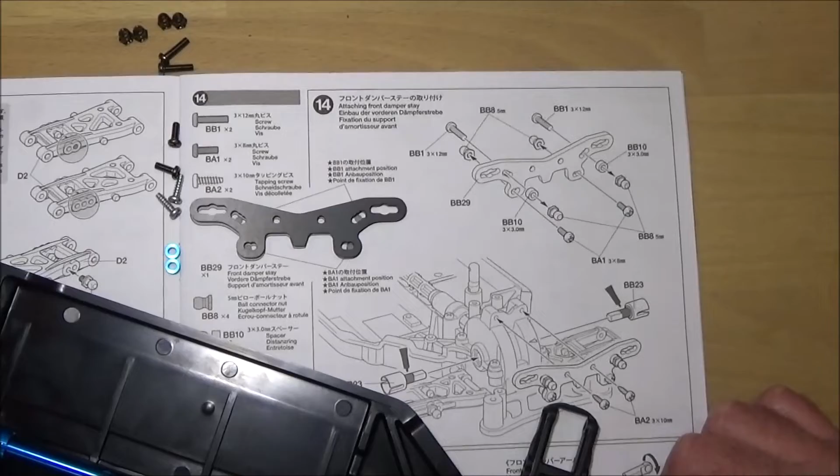Welcome to part 2 of my TT02 Type-S build. You see we've got this far already. We've got the lower arms mounted, the motor and all the gears in place, and the differentials.

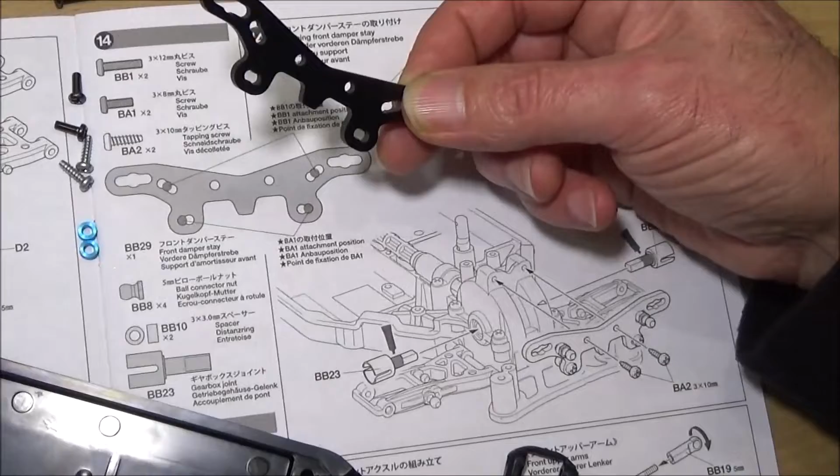So we're going to start this part on step 14, which is attaching this rather nice 3mm fibre reinforced damper stay, as they call them, or shock towers, whatever you like. We've got the parts ready here for this step. Just swivel this round, so this is the front.

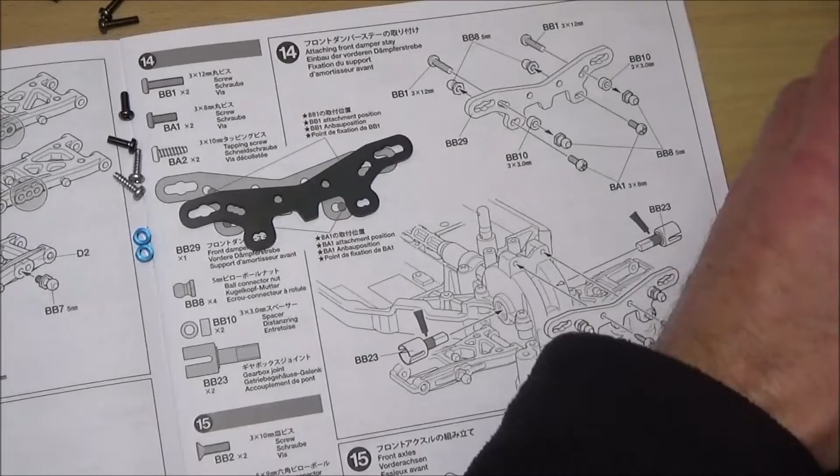What we need to do first is get these ball joints mounted in the right holes. So I think we'll start with BB1s, the 12mm. It says put it in the centre. Again, I might be adjusting this later depending on how the setup looks.

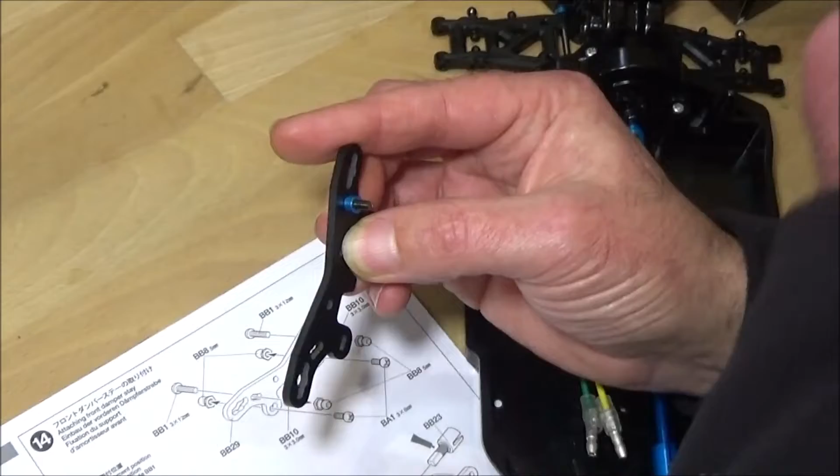I'm going to put a tiny bit of thread lock on here as recommended by Rob, because we've had these ball connectors come undone, haven't we? So we have. Is that too much, Rob? Should I wipe a little bit off? I can't really see them.

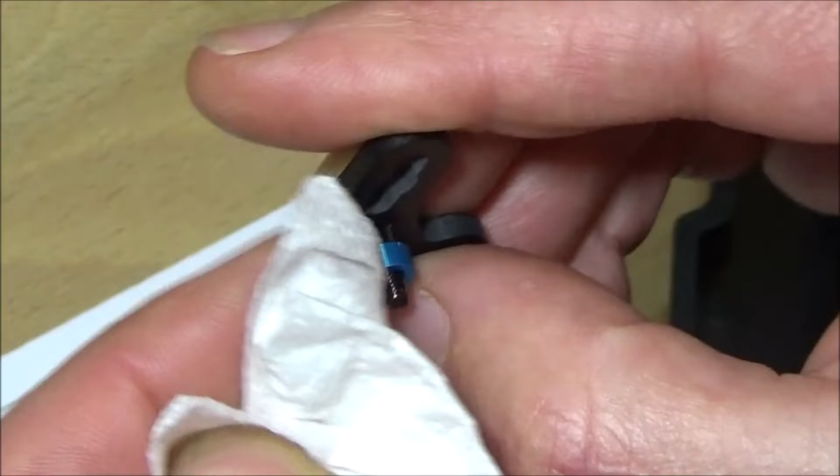Oh, you're looking through the camera monitor, aren't you? Yeah, that was a bit too much for such a size, because apparently it is this really strong stuff. Oh no, the red stuff is. So I might not be able to adjust the suspension in the future. Well, it won't come off. As I said in one of my replies, I've not had a problem undoing stuff when using this red stuff. Right, well that's good to know.

I think obviously I've just gone ahead with this, but this doesn't matter which way round you put the damper stay, because it's just a flat construction, isn't it? It is, so it shouldn't really matter which way around we go with that.

We need the shorter 8mm engineering screws, and it says to go to the outside of these two, and these are for the top suspension arms, aren't they? Yeah, so I'll try not to get any of this on the FRP.

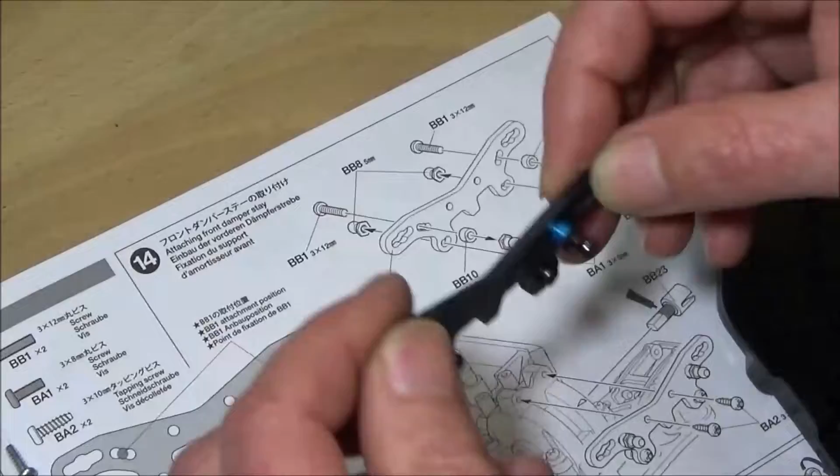And we nip those up there. This is the two 10mm long screws to attach it to the top of the diff case.

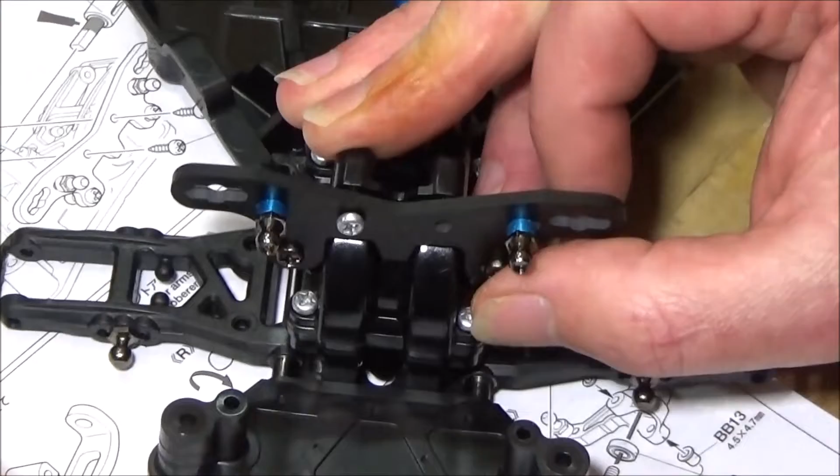So we're just going to fit this on here, and the last thing to do on this step is to fit the output shafts. I call them output shafts, again we've had this before, they call them gearbox joints. Just going to put a bit of grease on there as it shows, and just slip them in and hope they don't fall out. And then step 15.

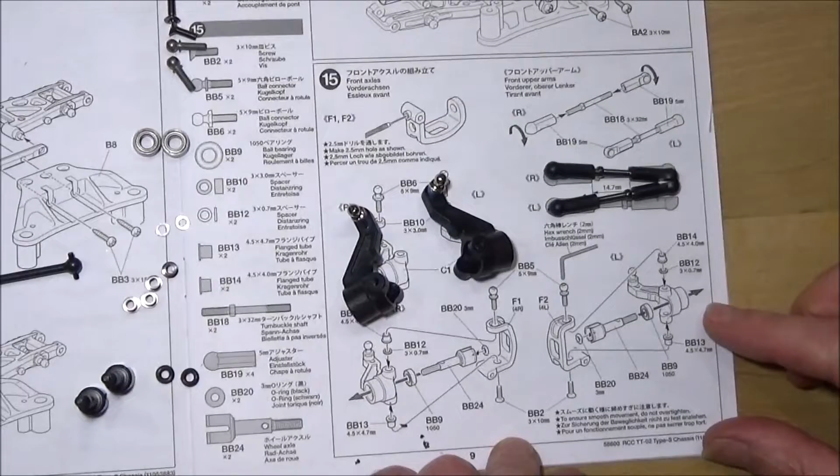Okay, so on to step 15. This looks like one of the more complicated steps, doesn't it, Rob? It does, so yeah, I paid good attention to this list down the side of the parts that you need, and to the diagram, because we've got some different parts here.

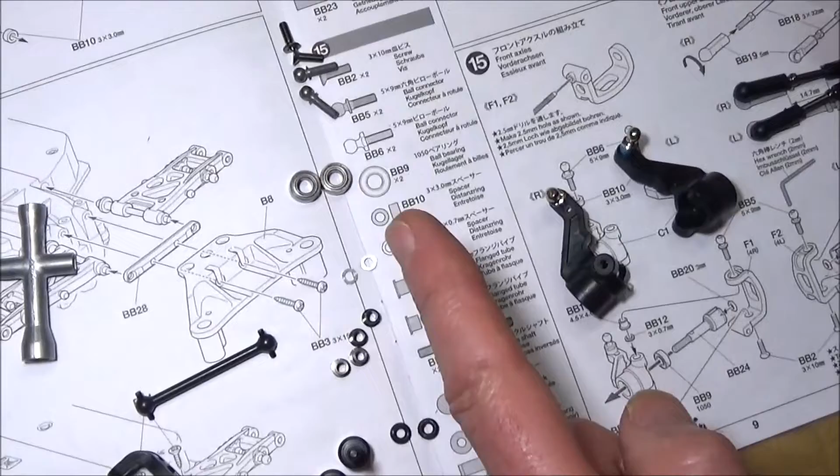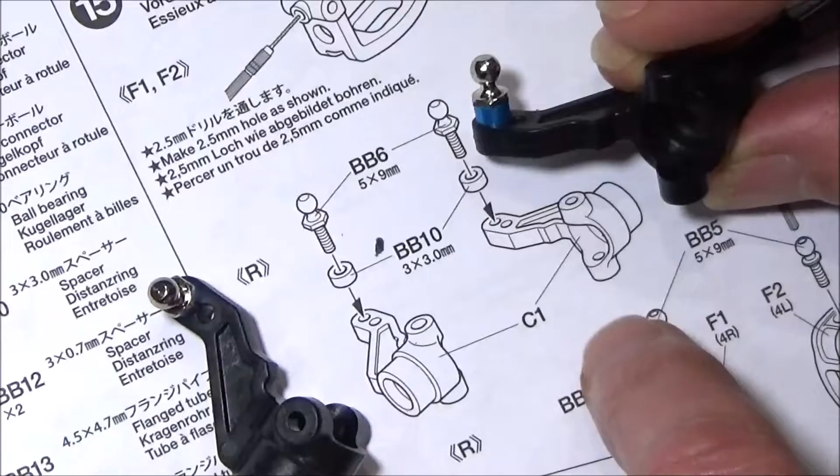We talked earlier about Tamiya using different coatings or colourings for metal parts. Here we've got a BB5 ball joint and a BB6, very similar, but they are different colours, and as you can see from the diagram, they are the bright ones there, the BB6s, which I've already fitted in there with the aluminium spacer. That's on the outside of the two holes. Again, if you just line it up with the diagram, you can't go too wrong. That looks about right to me for the left and right sides.

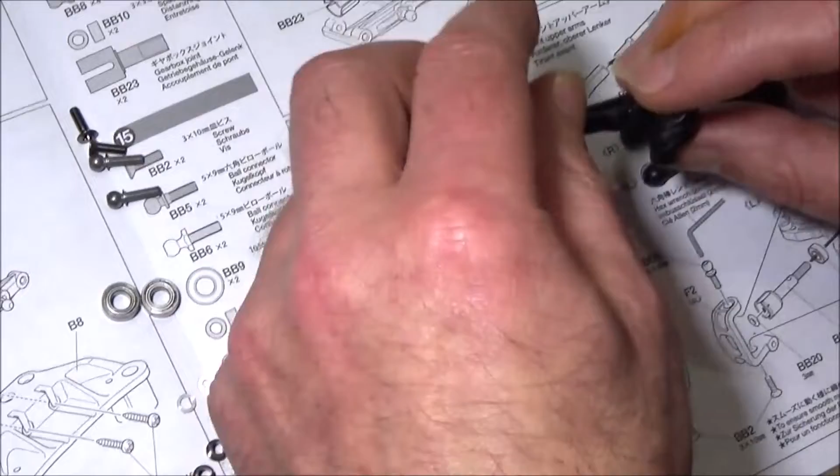These parts C1 are both the same, aren't they, Rob? They are, so they're both numbered 1, shouldn't go too wrong with that. That was the easy bit. Again, be careful not to tighten these too much into the plastic, it's easy to strip and ruin your thread.

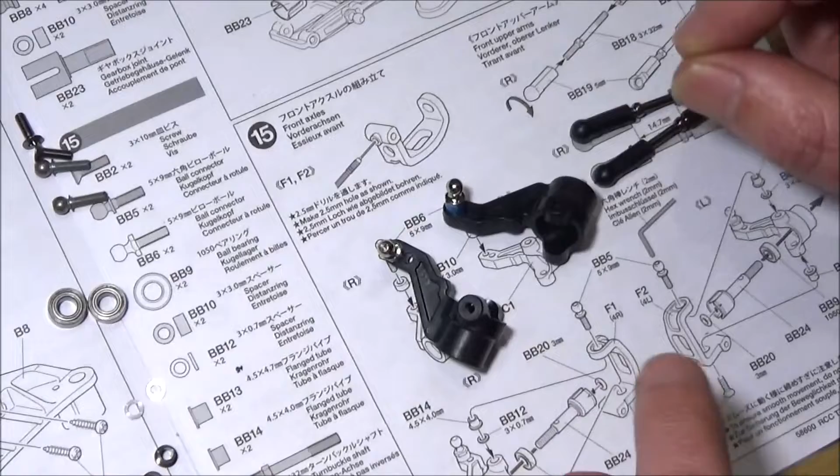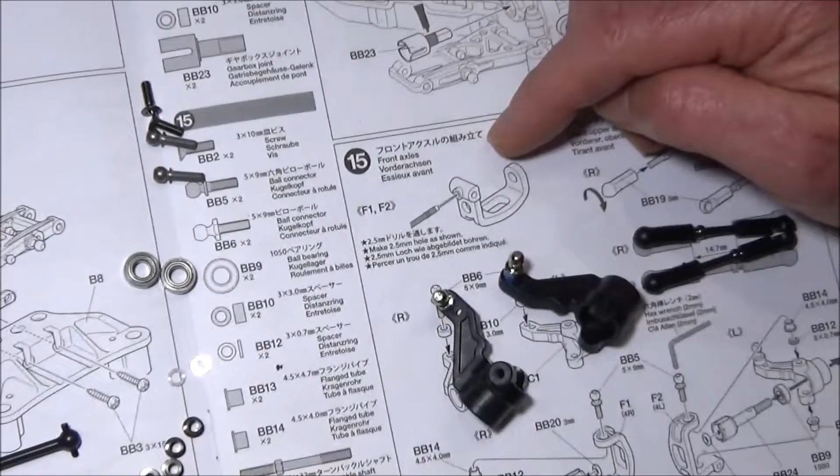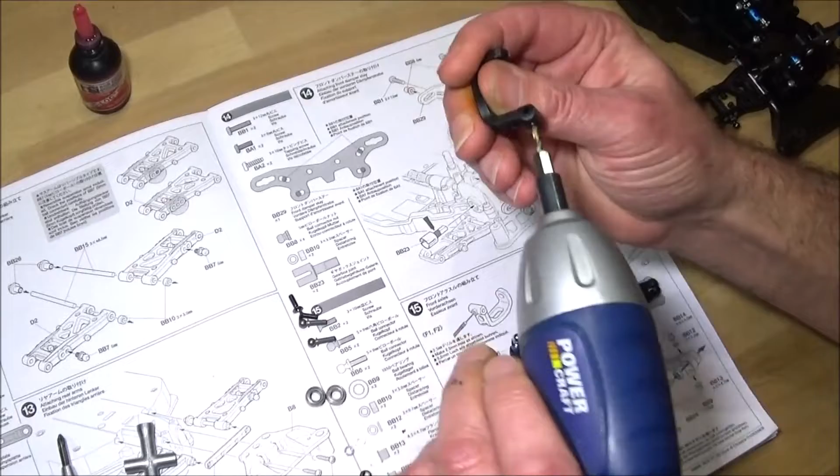The next thing to note is that you have to make a 2.5mm hole in the bottom of the F1 and F2 parts - there's me calling them C hubs or C cups. Now these are numbered differently, aren't they, Rob? They are, but they look the same. I don't know, but they are numbered differently. So we'll go, this is F1, and we need to get a 2.5mm drill. It is already started, but as you can see, it doesn't go all the way through, so you need to just drill into there.

Okay, and that I think is for the grub screw that's going to locate the pin that goes through there. Anyway, so that's one, that's two. You need your two wheel axles.

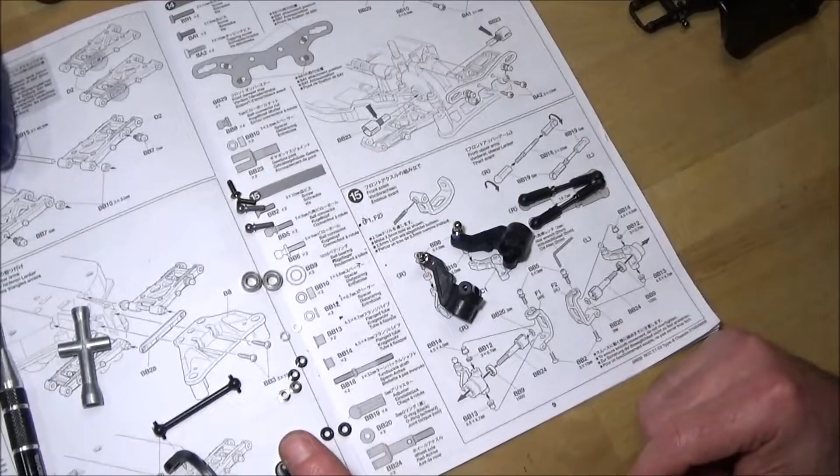You've got the O-rings which we need to put in there. Just put that in ready, then push it in with the dog bone. Sometimes this is easier said than done. I did put a little bit of grease in there to help, didn't I, Rob? Makes it a little bit easier, because sometimes they really grip and you can't get them in. So make sure those are in there and seated properly.

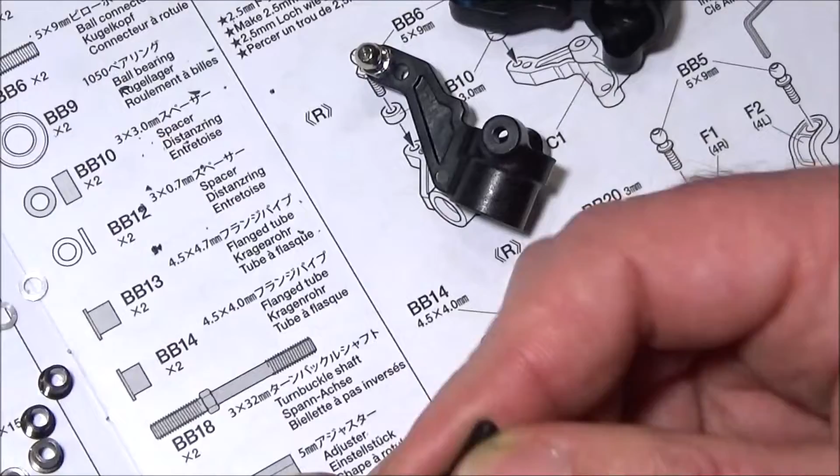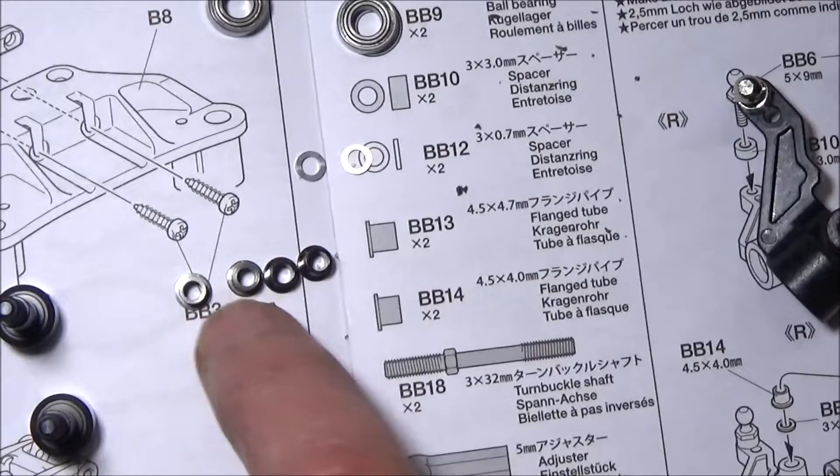Next thing, we've got the small 1050 bearings. Make sure you can match them up on the diagram there. We've got two very small 0.7mm silver spacers, and then the BB13 and BB14. They're 0.7 of a millimetre different, so be careful which ones you fit where. If you put them side by side you can see the different sizes just about, but it would be easy to get those mixed up.

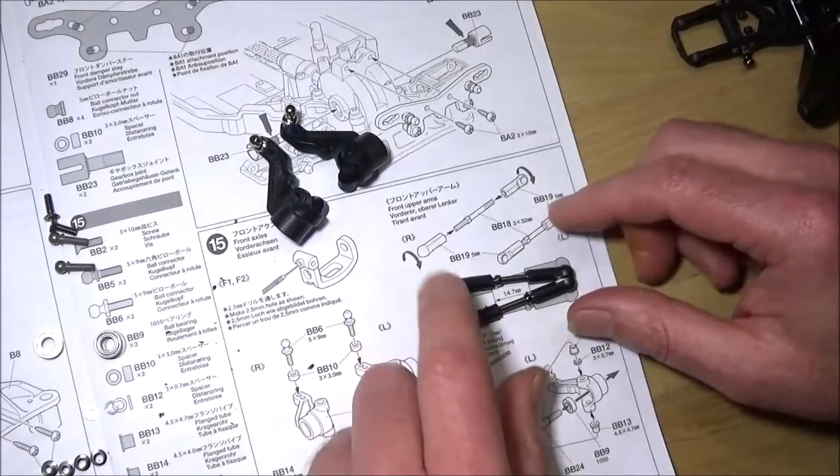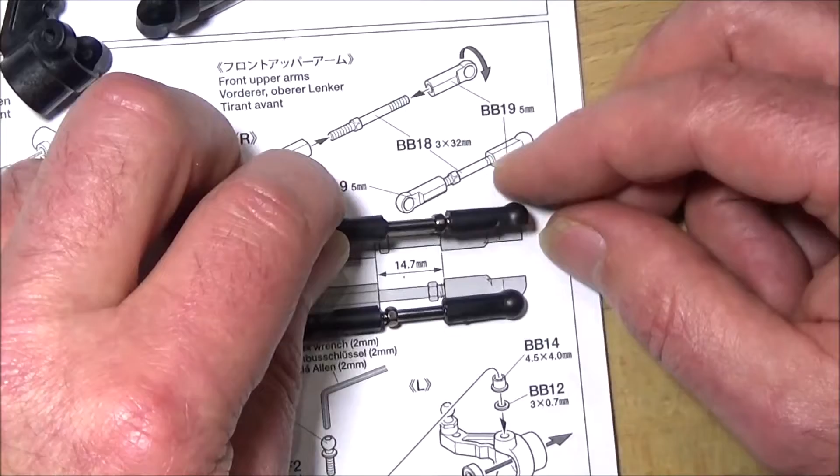Okay, so the next thing is the upper arms, the front upper arms. I've already screwed the BB18 rods with the BB19 cups. I put a bit of grease in there and it went together a bit easier than on my XV01. Again, make sure you match them up with the diagram. You should have one cup facing down.

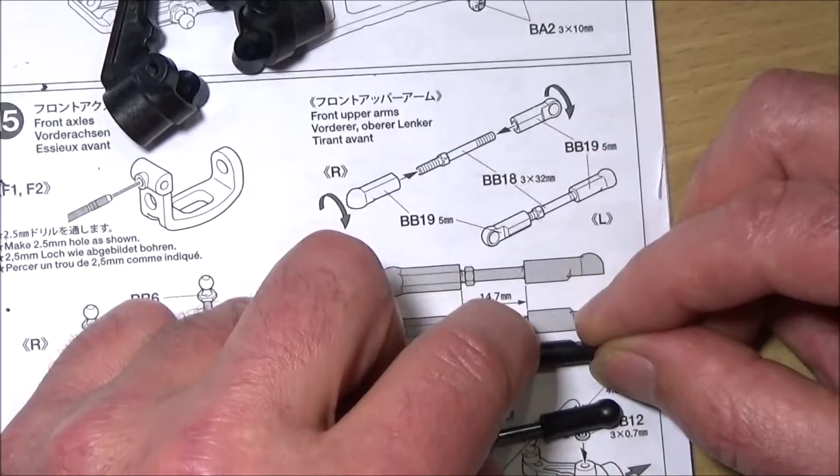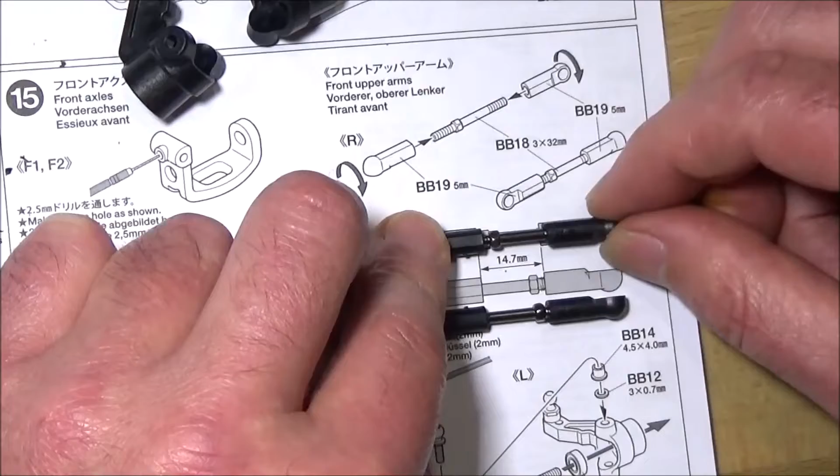Note the placement of the turnbuckle adjuster there, and again on this one make sure that end is down, and this one points a quarter of a turn in the other direction. So those are for the left and right top arms.

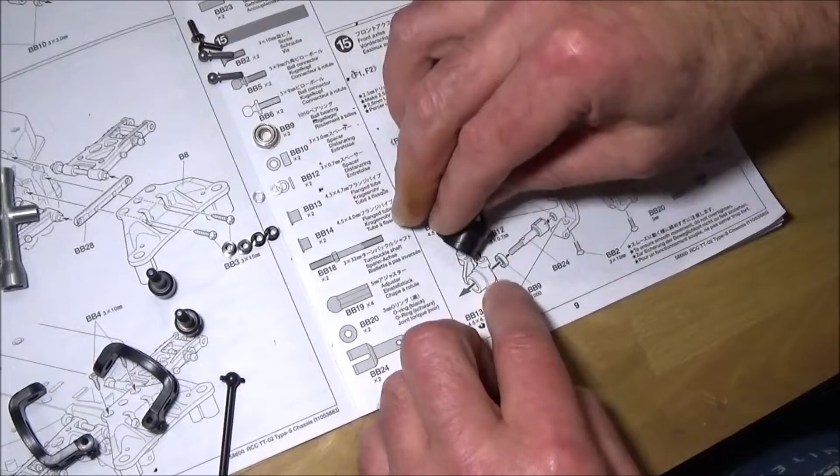Okay, let's try and get these bits together now. So drill the holes, we need to get the drive shaft put together. So I'm going to take a bearing, I'll do the right hand side first. We need to push that bearing into the holder, I'll use the shaft to make sure it's in. Okay, let's get rid of that for a sec.

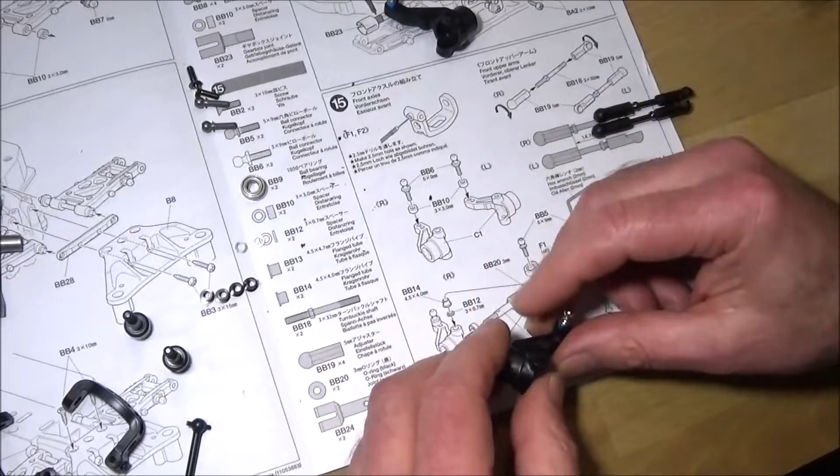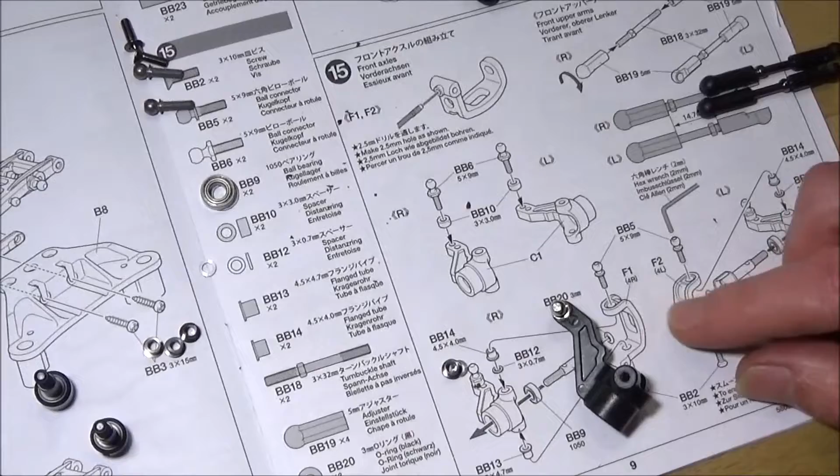Now with that located in the same direction as the diagram, I need that very small shim, and I need the BB14, which is the shorter of the two. Then I need F1, like so, and then we take BB5, which is the grey of the two ball joints, which we have to fix in with a hex drive.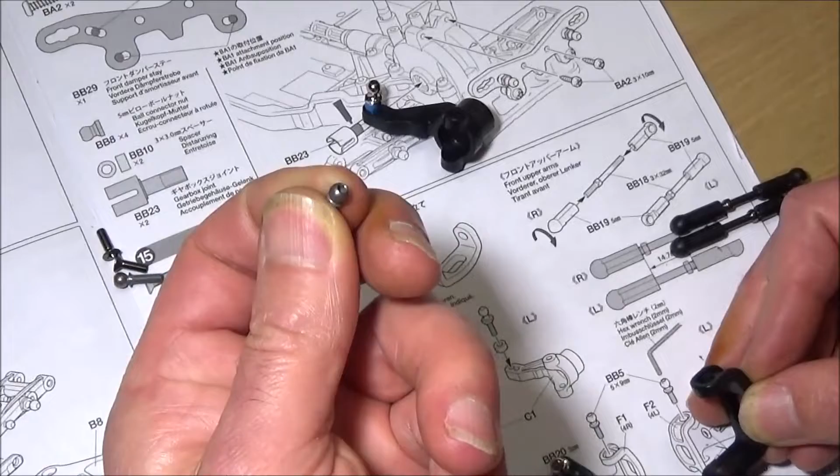Okay, I've got it. It's going to fit down into that one, isn't it? As you can see with the light here, it's a bit tricky. So that's got to go... Ah, right, it does click into place. Now that makes sense, doesn't it? Yes.

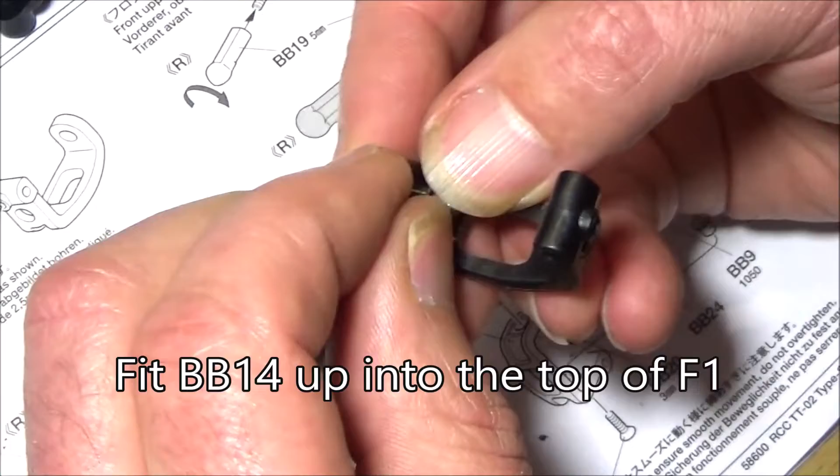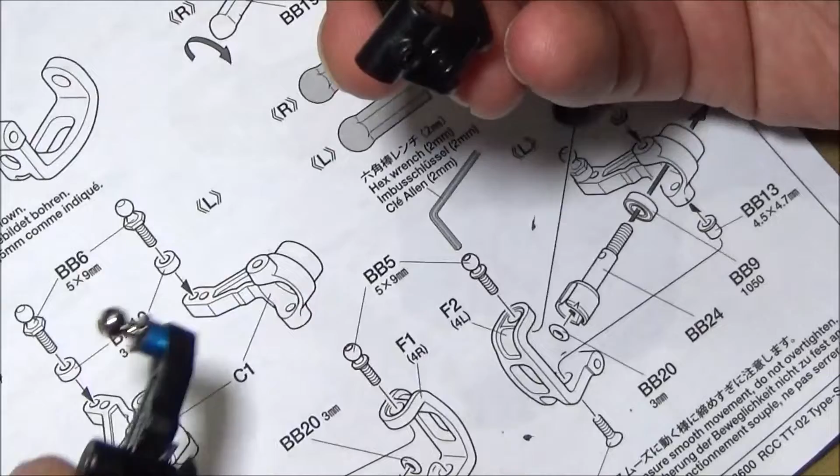So this one goes up into there, try and get the shim in place. Well, I did say this part was going to be quite tricky, and it certainly is turning out to be quite tricky. So we can get that there, and not lose my drive shaft again.

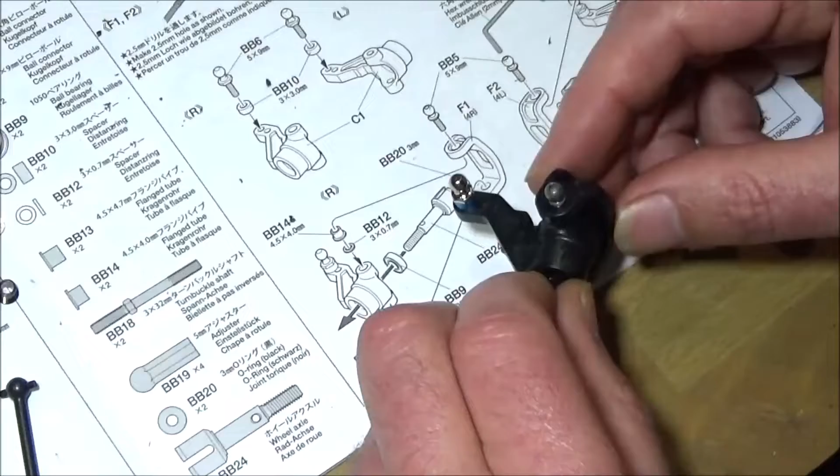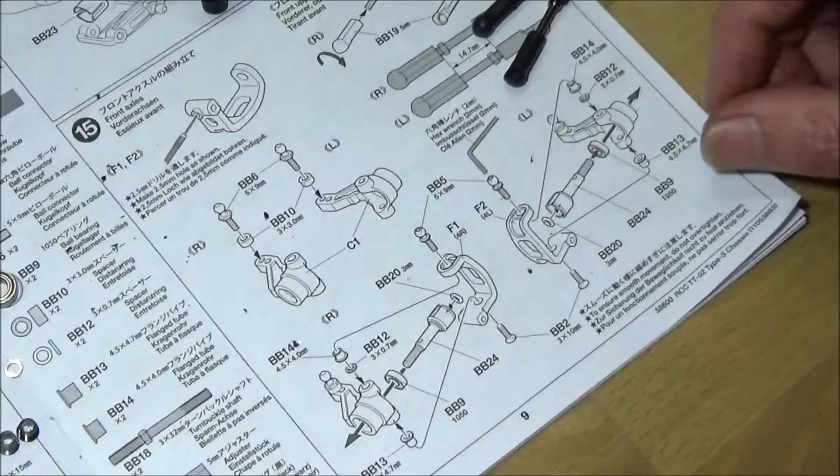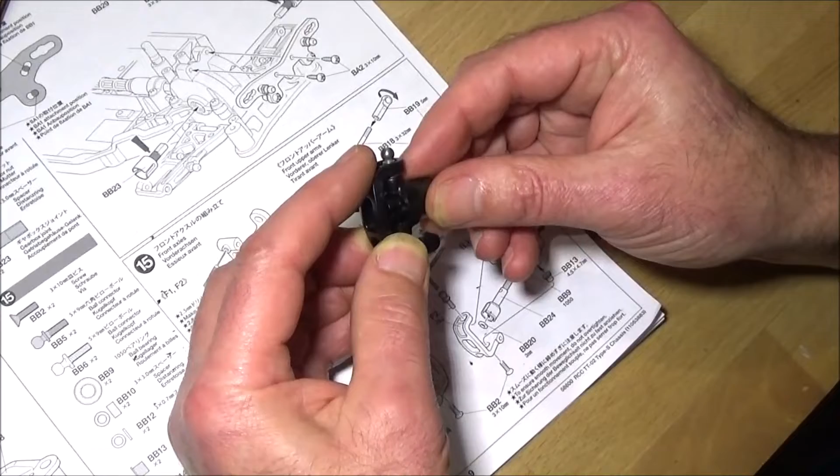So there we go, just make sure this is done up. Right, so that is the right side done by the look of it. Okay, and we'll just do the same but the opposite for the left side, and put the countersunk screw in again. Note it says to ensure smooth movement, do not over tighten. I think if you left it too loose it would actually fall out. It's moving smoothly, there's no real play in that. So there we go, that is step 15 done.

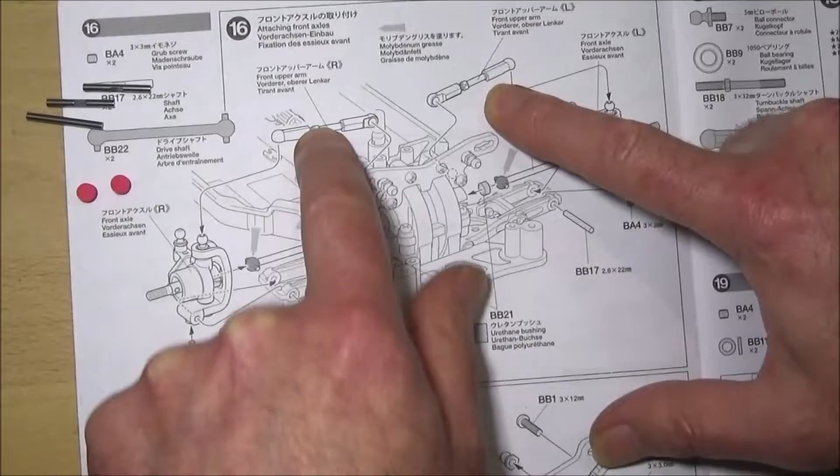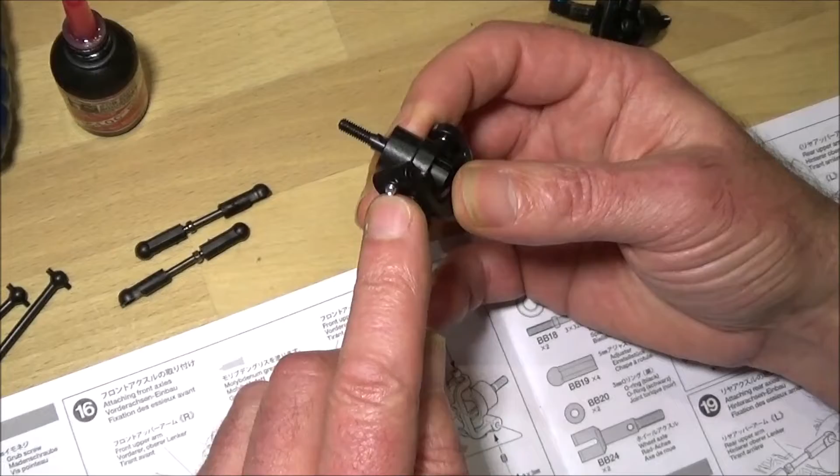Step 16 says attaching front axles, but there's a bit more to it than that. We've got the dog bones to go in, we've got the top arms to go on, so you need your top arms you've already made, your dog bones, and 2 grub screws which you screw into the bottom of the C-hubs. I've already started them, I haven't screwed them very far in, but put one into the bottom of each C-hub where you've drilled the hole through.

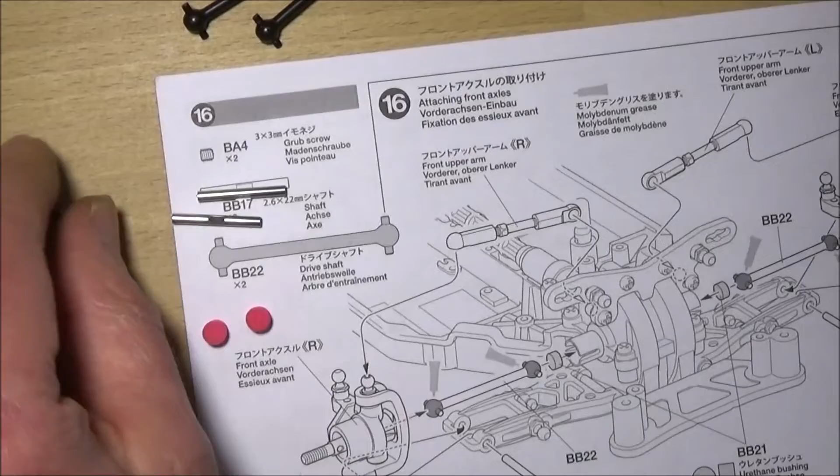You've got the bottom shaft that goes through and holds the bottom of the C-hub on. You need the shorter pair of the 4 that you get - there's a longer one, you don't want that one, you want the 22mm. Again, check on the diagram. You need the foam urethane bushings that go into the output shafts, and basically let's stick it together.

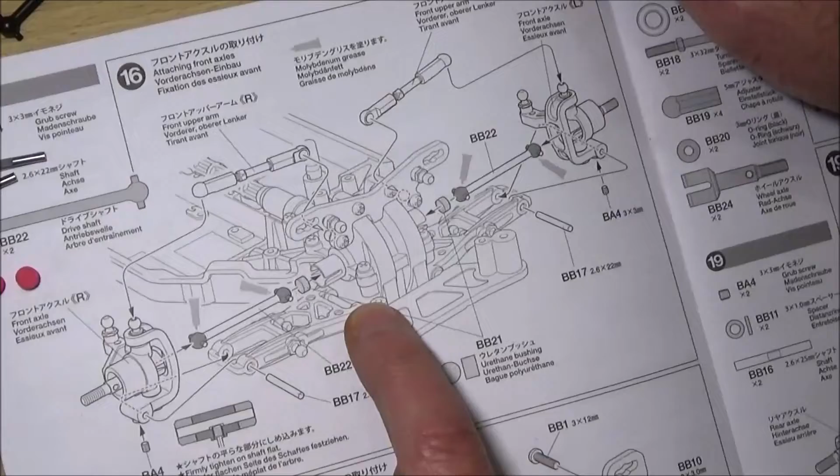So let's make sure I've got them the right way around. With your ball joint facing up and your steering arm pointing backwards, at the front end of our chassis, we need to fix this in here, and that grub screw is going to go onto that flat, so we need to put that there a bit. Oh sorry, you got it? Yep, got it, that's your BB17. The flat you need obviously to put facing downwards because the grub screw is at the bottom of the C-hub.

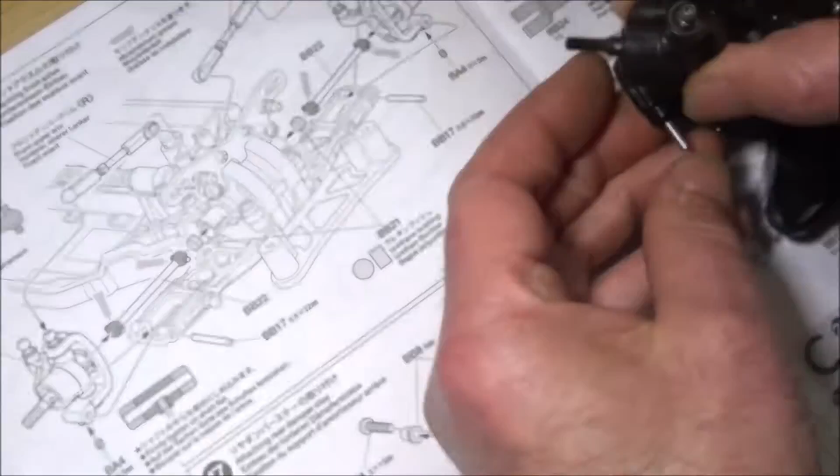So let's see if I can do up that grub screw.

So that's the only thing stopping that pin from coming out, isn't it? Yep. Well, let's hope the grub screw doesn't fall out. Again, not going mad over tightening, but I don't want it loose.

Now that's in, just give it a push. Yeah, that's not moving, so hopefully that's fixed into place.

Okay, now I can see we've got an issue with the suspension being limited, Rob. Right. Which is, this is hitting that cross piece. So to increase my ground clearance that I would like to do, I need to take some material off that part of the lower suspension arm.

Yeah, quite significantly. So I'm going to take a bit of material off that, because as I say, I want it to be a rally car, and that is definitely not going to go down as far as I want it to. I can see that that's not going to give me the ground clearance I want, so I'm going to take some material off this arm. See you in a bit.

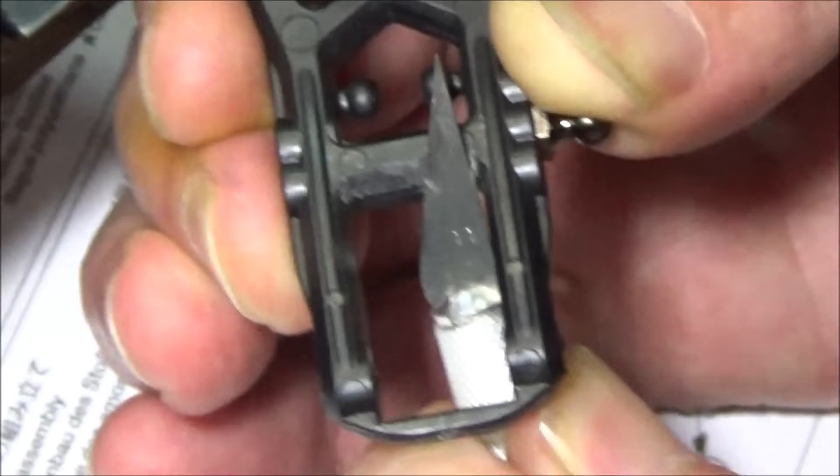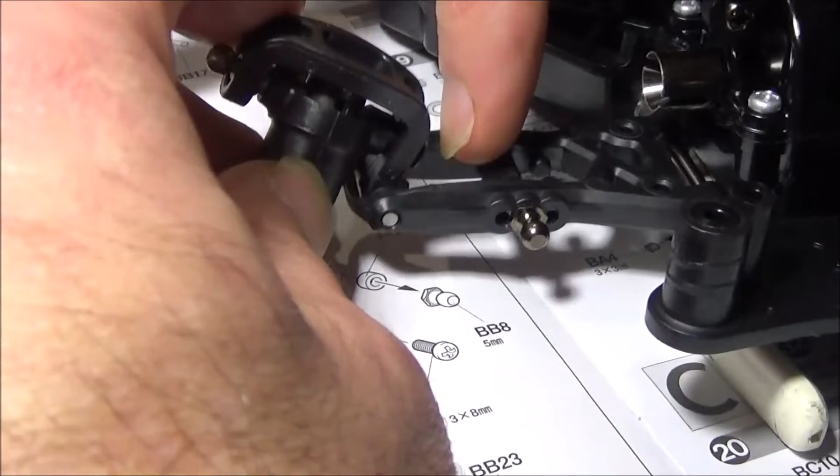Okay, so hopefully you'll be able to see here, I've taken with the knife the edge off this cross piece, and now that C-arm can fit down. You can see the angle we've got, while the shaft is still straight, the angle on the bottom wishbone, bottom A-arm, it's quite far down, whereas if you compare this to the other side, there's the standard one without being cut away, and the hub there hits, and if we keep that still horizontal, you can see from side to side the difference that we've got in suspension drop or travel.

So if you want to take off-road or want a bit more travel, I reckon that's going to give us about 10mm more suspension throw. So there you go, that's what we need to do, guys. I'll just get on and trim the other side down as well.

Okay, so there's that material shaved away. It should give us a bit more travel, we'll see.

So just to finish off, we need to put the neoprene in the drive cup. It's your dog bone, put it through that hole, get it lined up into the wheel axle cup, and then make sure you've got these the right way around.

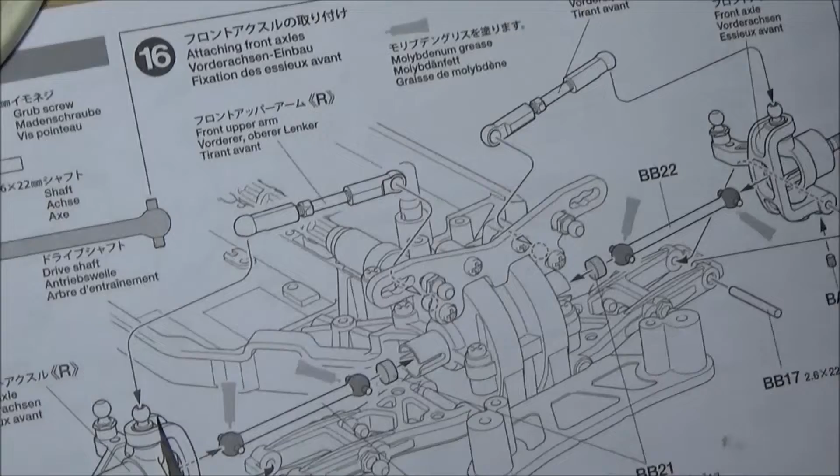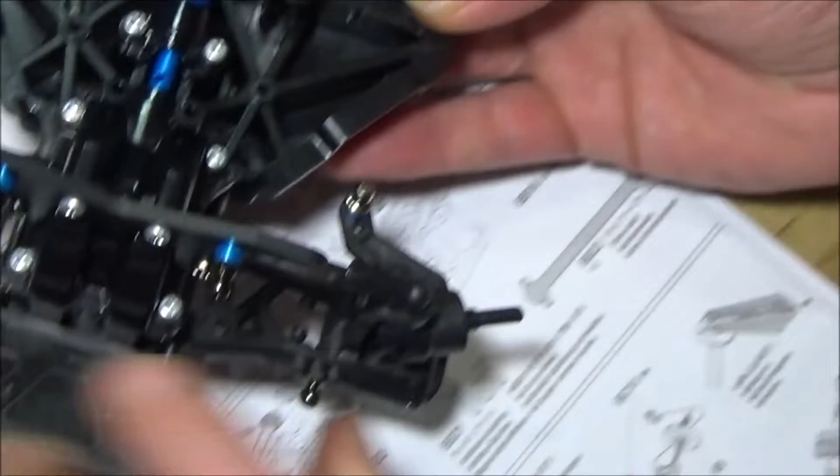So it shows in the diagram there that on this left hand side, that turnbuckle adjuster goes on the outside, so you pop it on there, and that clips onto that back ball joint. And I've already done the other side, and again it shows the adjuster is on the inside. I'm not sure why, but maybe we'll find out later. So that's the front suspension finished.

Could that be so you turn the rods the same way to adjust in or out? In or out, yeah. It may be, I'm not sure.

Anyway, you see it's sticking there. That's due to that neoprene. It's real solid. Not used to that, but it does, obviously, because it's soft material, it does give, but it's definitely causing a little bit of resistance there on both sides.

But hey, it said put that in. I know on the XV-01 it said, I'm sure it said to cut them in half, and on this one I think if we quickly jump to the back, it does say to cut that in half. Anyway, we're going with the manual at the moment, so that's what it says, that's what we've done.

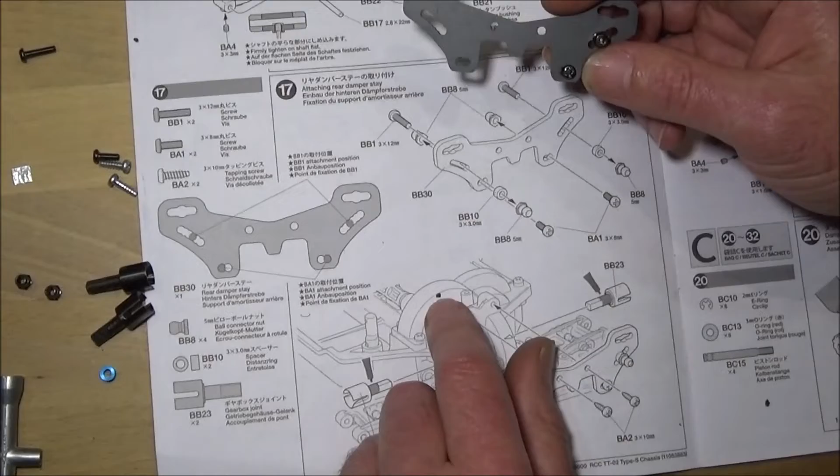Right, that's step 16 finished. Step 17, this is doing the rear damper stay. I've already put the ball joints on the one side. Just quickly show you putting the other one on.

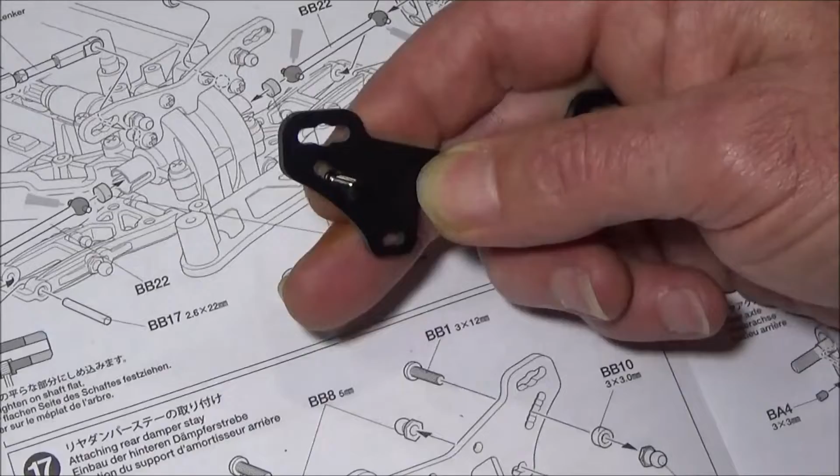So we need the BB1 12mm screw, and that's going to go through. It shows the third one from the bottom. So 1, 2, there's a third notch, just fits in there. You need your blue 3mm spacer, tiny bit of thread lock.

And then BA1, which is an 8mm screw, that needs to go through the outside of those two bottom holes, facing the other way, like so. Again, a little bit of thread lock, and put on that bottom ball connector.

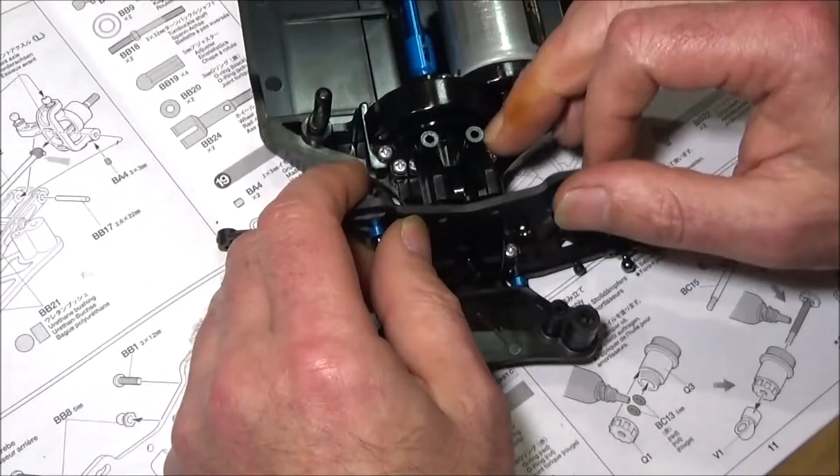We need to get 2 of your ordinary self tappers, 10mm, fits on there. Make sure that the shock ball joints are pointing towards you, so that's the wrong way. It'll easily go on the wrong way, like I didn't just do, did I, Rob? No, I never did put it on the wrong way.

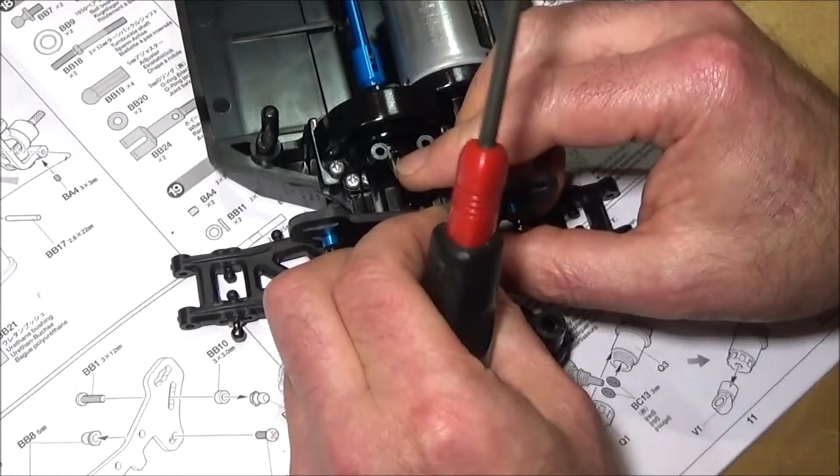This is it, this is what you do when you build a kit, you learn as you go. So I won't do both screws up because this is the end of step 17. In fact, go on then, I will do it, because we'll go straight into step 18, I think.

So all we need to do to finish this step is to grease these, which I already have done, and just place them in the diff like so.

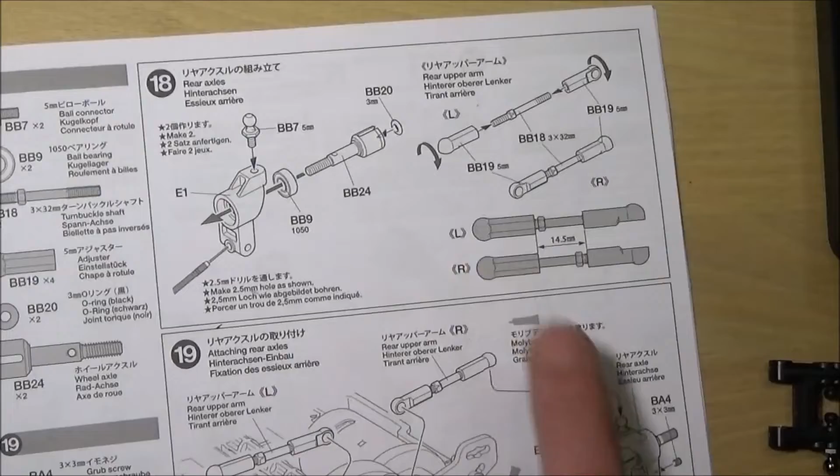So nearly there with the suspension. Going on step 18, what we're going to do now is I'm going to go away and make these arms, because you don't want to watch me screwing these and it takes quite a while, and we'll get these pieces ready and be back in a sec.

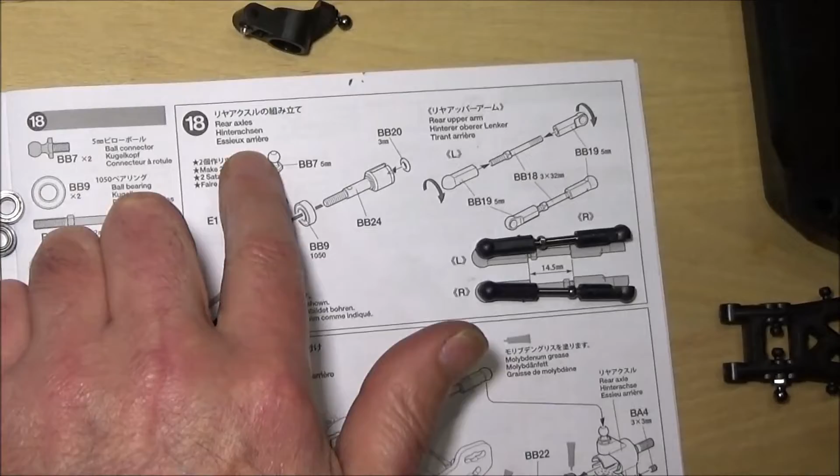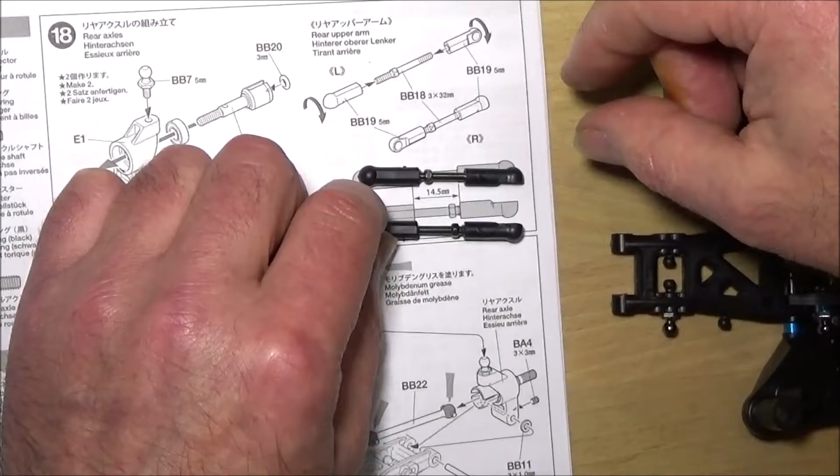So step 18, we're doing the rear axles and the rear upper arms. Again, to save you the pain of watching me screw these things in, I've already got the BB18, the 32mm long bar with a turnbuckle adjuster on it, screwed them in, put a bit of grease to help it go, and set it to the right length. You can just follow the orientation there, one's opposite to the other, so they're ready to go.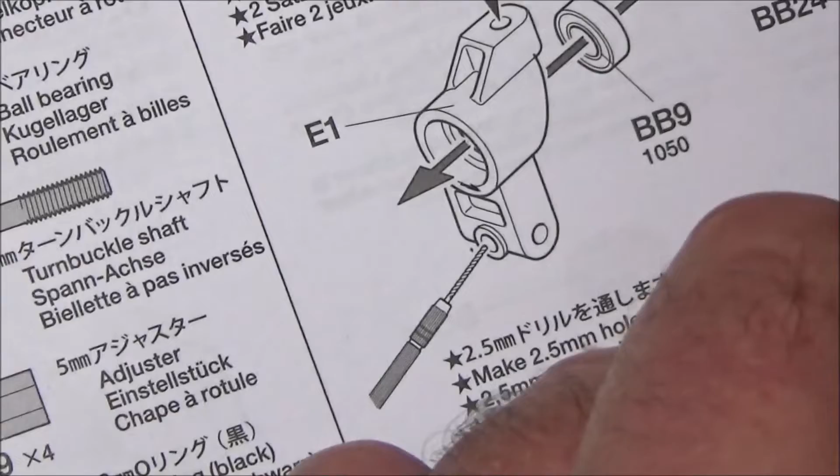Also, you need to drill through that 2.5mm hole which we've drilled through, and I've just started the grub screw off, so it's already in place. That's going to hold the pin in the bottom. We've got the BB7 5mm ball on the top, so we just need to put our 1050 bearing through the inside.

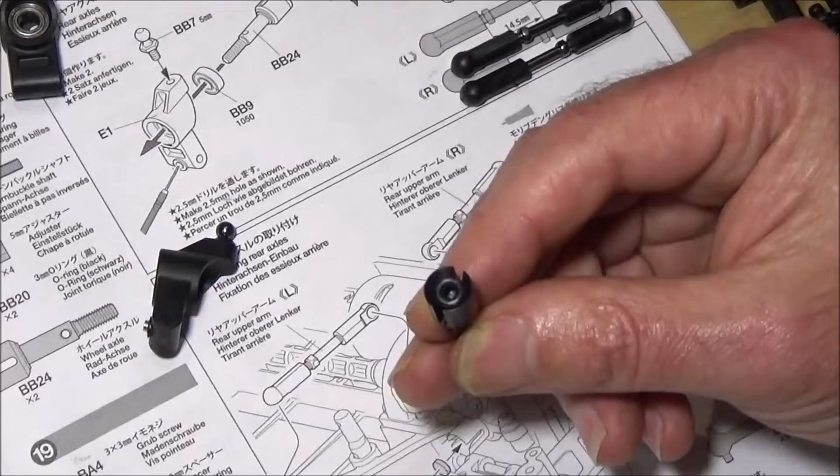You need to get your wheel axle, again put a grease in there, helps get these O-rings in. And where's the dog bone, get a dog bone to push it into place. Make sure it's seated right at the bottom like that. Same for the next one.

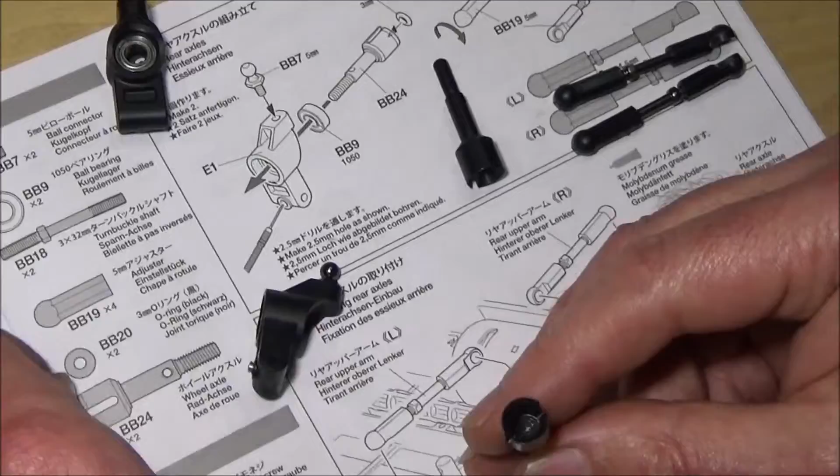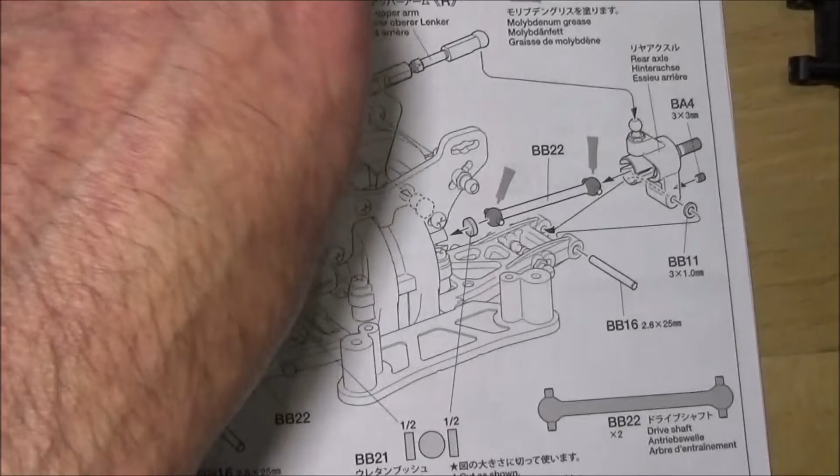So that's step 18. We'll go straight on now to step 19, where I'm going to finish this part of the build, which nicely takes us up to the end of parts bag B. The next time we'll be opening parts bag C.

So there's the rear of our chassis. We need the one urethane bushing that's left.

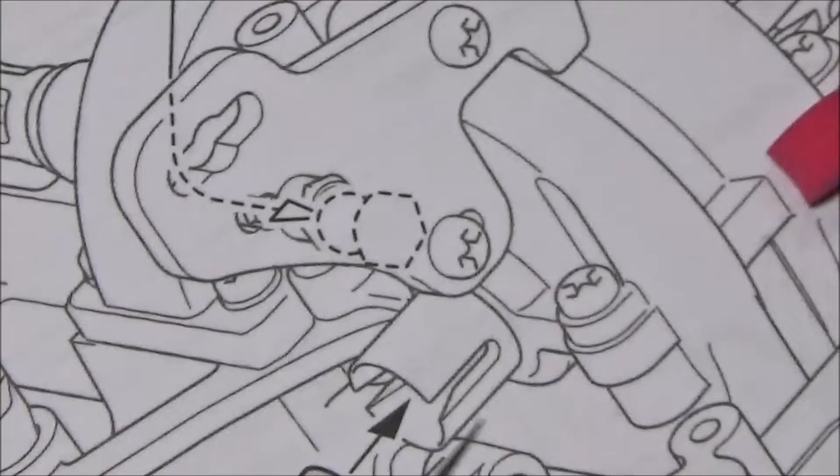They don't give you a spare, do they, Rob? No. What happened there? Did you see that? It was like repelled by it. I don't know. Ran off.

Yeah. And we need to slice this thing in half. We do have two halves. Again, push those into the drive cup. Why the back ones are in half and the fronts aren't, I have no idea. Just make sure that's pushed all the way in, and same on the other side.

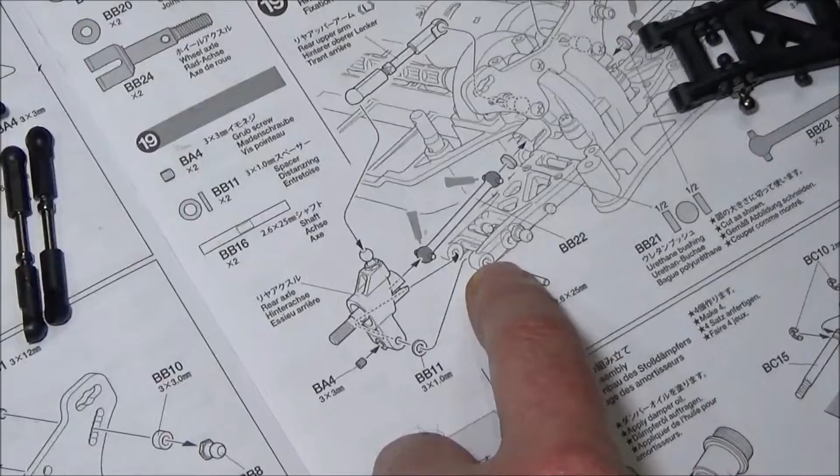I'm sure you'll believe that I've done that, Rob. They're both in. Yep. Okay, so we need to get the pins for the bottom, which are your BB16, 25mm long. They're rolling all over the place. These are the same, aren't they? So it doesn't matter which side these go, Rob.

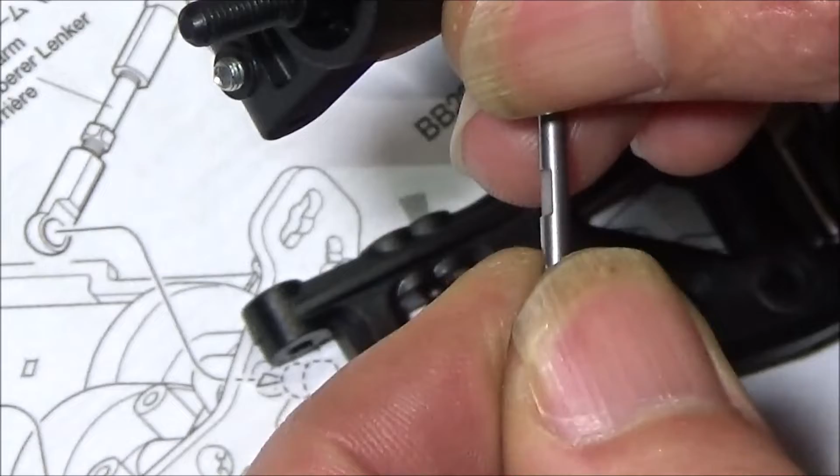And this time, because the grub screw's on the outside, you need to make sure when you push the shaft in that the flat is pointing outwards. So let's see if I can get it somewhere near. This one is quite a tight fit actually.

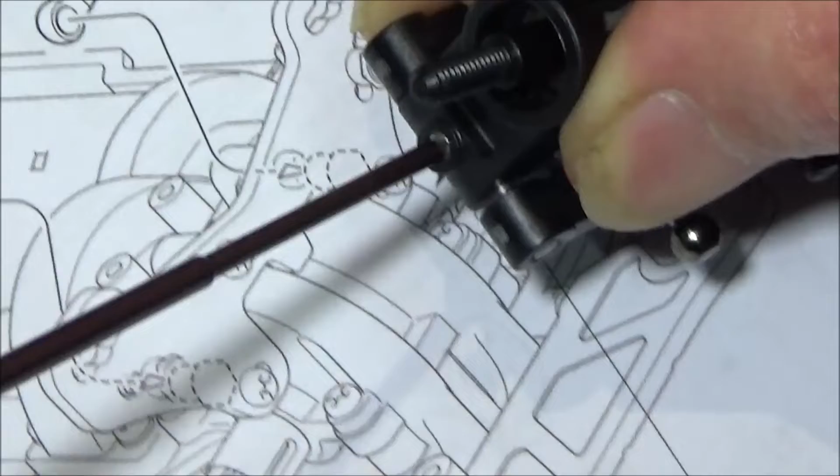And then let's just give that grub screw a nip up. Again, don't go too mad, if we strip this plastic here, we're going to be in trouble, aren't we, Rob? Yeah. Because that's the only thing holding that pin in place.

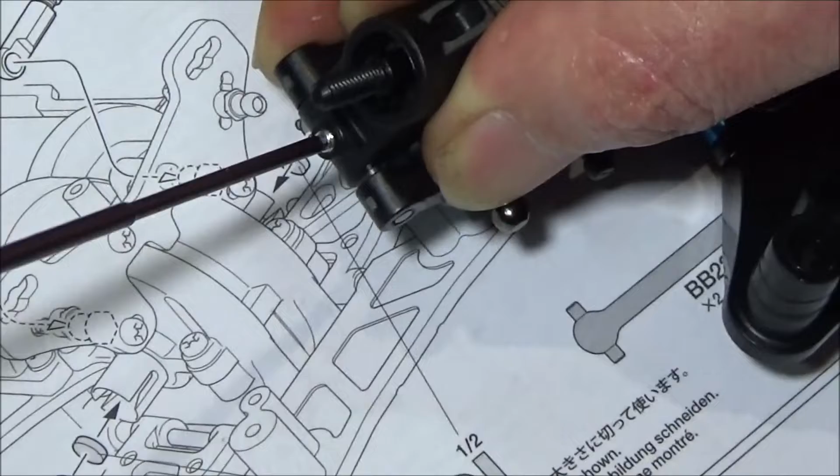That's very tight, is that? Oh, I think I missed something out again. A shim. Here we go. I missed out that shim. So it says here, BB11, a 1mm spacer. Oh, I've missed that out. There we go, live on camera. We all make mistakes. Well, especially me, and it says put it in the back, doesn't it?

Yeah. So if I can try and wheedle that into position without dropping it on the floor. A bit tricky. There we go, this time. Try and remember to do that on the other side. There we go. Nice, there's no play in that at all, Rob.

Cool. Nice one. Okay, so shaft, again, you probably might have noticed, it does say to grease these, but if you've seen my other builds where I've done rally cars, I don't want to make a nice grinding paste in these cups, so I prefer to leave them dry.

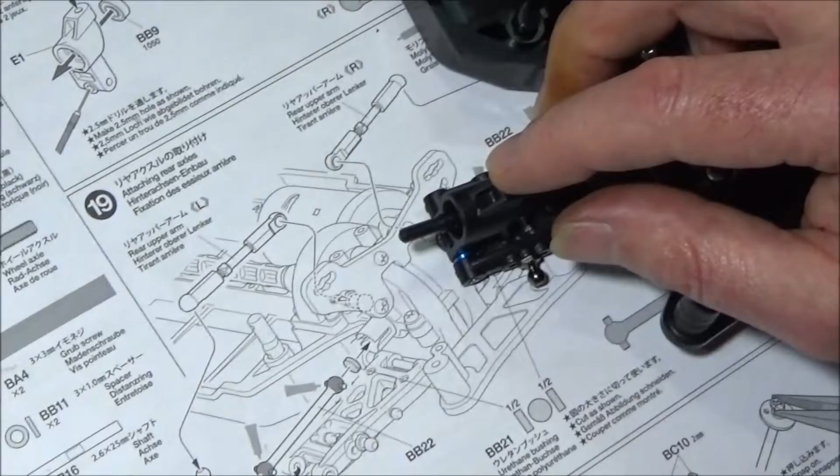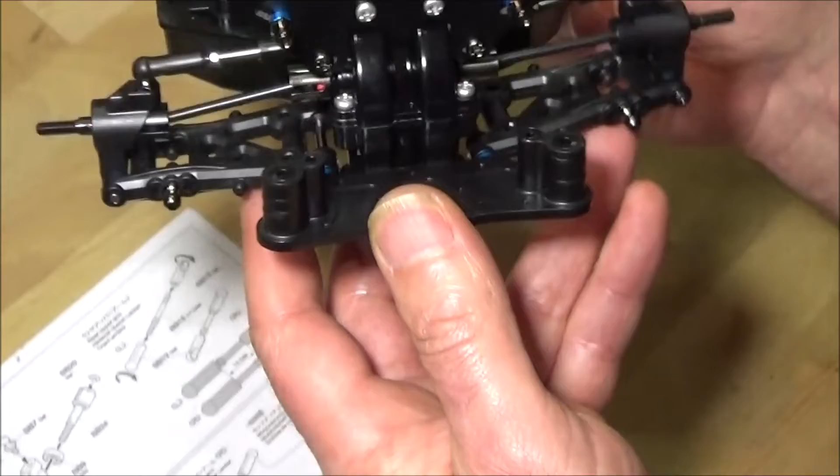Right. Okay. You can see the difference between the front and the back without those C hubs. We've got a lot more downward travel, haven't we? Yeah. And these, I can feel those bushes tightening those shafts up. But hey, so again, you see the difference front to back, but these are sitting downwards somewhat, so anyway, we'll try it. So there we go, I'm going to leave it there.

We'll start with parts bag C on step 20 next time.